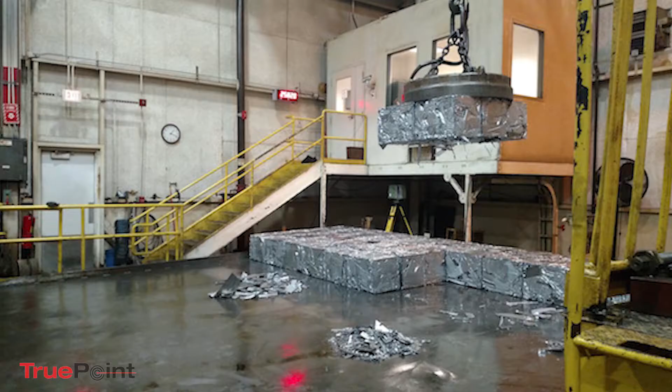The type of facility involved in the project can affect the cost. At TruePoint, we have the ability to scan many different kinds of facilities, from warehouses and refineries to churches or office space. Complexity, line of sight, and sizes all play a major role in determining the number of scans needed for the job. The type of facility and what needs to be captured impacts the scanning technique used to determine the time on site and therefore the cost of scanning.

For example, an empty 100,000 square foot warehouse could take fewer scans than a 5,000 square foot mechanical room, or an office building with furniture in it, or a construction site with a lot of equipment to scan around. The reason for this is line of sight considerations. Our technology requires line of sight, so if there are a lot of obstructions, it will take more scans to complete.

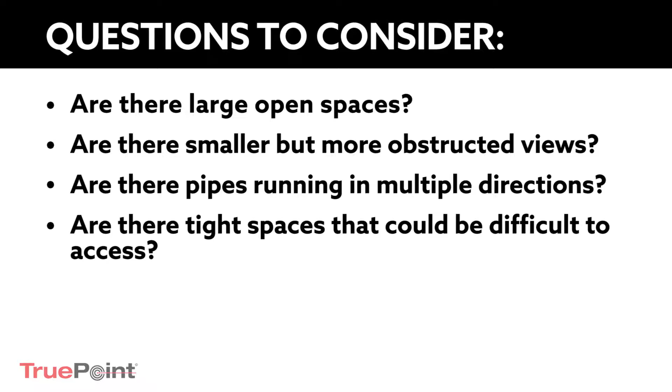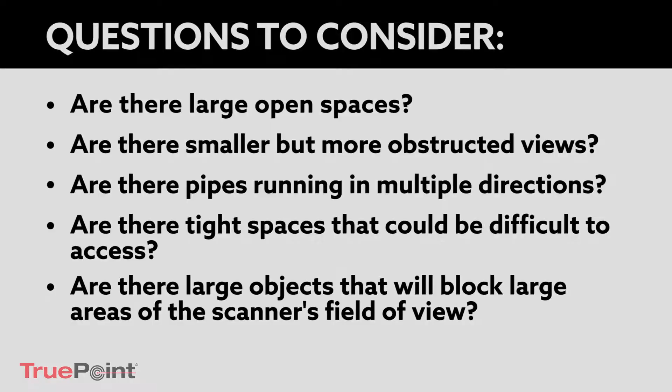So you can ask yourself, are there large open spaces, or smaller but more obstructed views in what I need scanned? Think about how many obstructions, both horizontally and vertically, there are in the space. Are there a lot of pipes running in different directions? That would require more scans. Other questions include: are there tight spaces that will be difficult to access? Are there large objects such as equipment or HVAC systems that might block large areas of the scanner's field of view? All of these considerations impact where we place targets and help us determine how many scans we need.

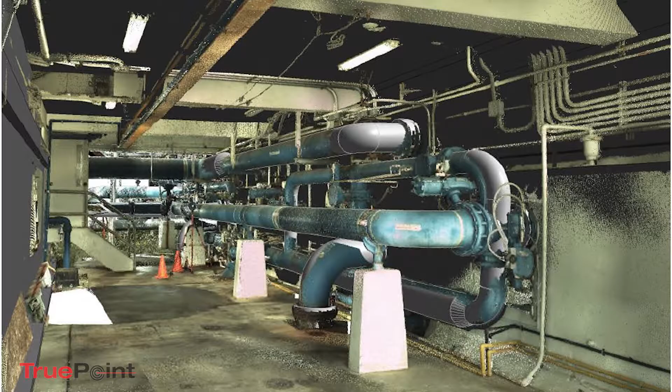Also important when determining cost is the size and complexity of the space. For example, what is the square footage of the space that needs to be scanned? Before we scan, we need to know how many floors, including the basement, rooftops, and mezzanines, we'll be working with. We also need to know whether the space is occupied, or whether there is any equipment, inventory, furniture, or other obstacles in the way.

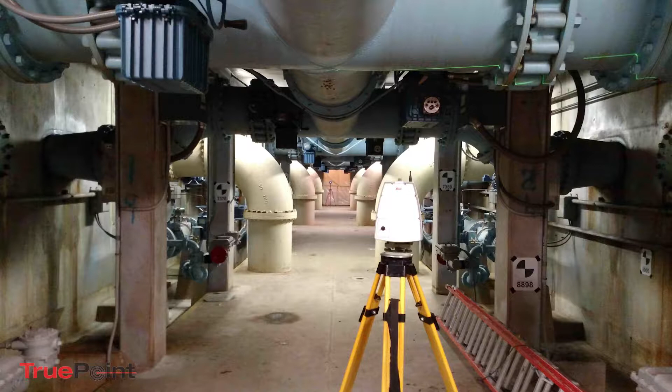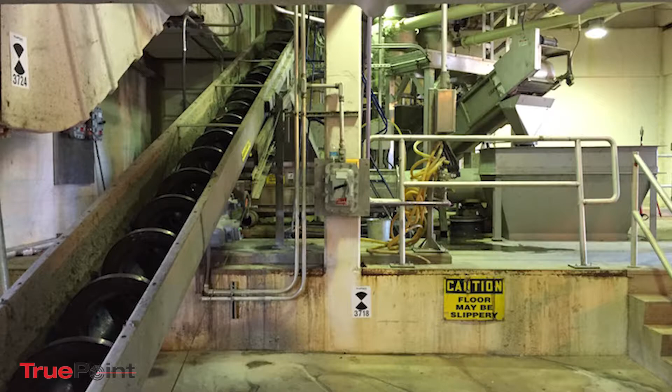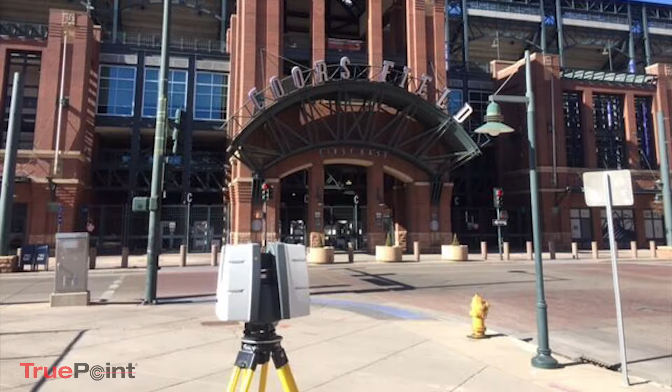Additionally, if it's an active site, are there and will there be lots of people around? Are there trucks that we might have to work around? Furthermore, we need to know how congested the space is. Are there a lot of pipes? Finally, when looking at the type of facility, we need to know if it's interior or exterior, or both - in other words, is the project inside or outside? All these aspects can affect the scanning and therefore are important to know when determining the cost of your project.

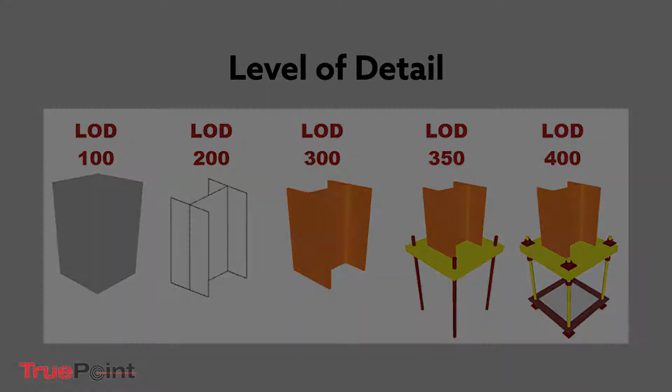Target objects are also factors to consider in determining the cost of the project. Target objects include pipes, conduits, walls, MEP, columns, beams, and steel, to name a few. Related to this is the level of detail that you, as the client, need. The level of detail can determine the number of scans needed, and this can vary significantly. For example, to scan only for structural dimensions - walls, ceilings, floor, etc. - of a room will require fewer scans than if all the electrical conduit needs to be captured. Therefore, it's important to know if you need all piping detailed, or if pipes above a certain diameter would suffice, for instance, 2-inch or greater.

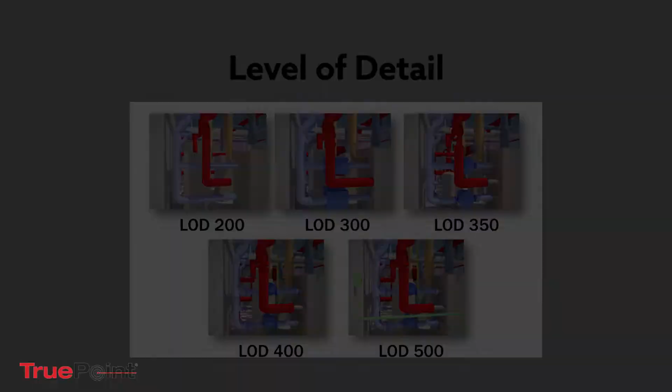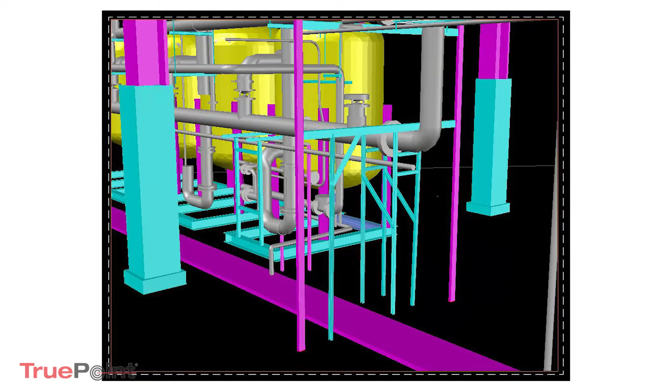In determining the cost of a project, when we talk about goals, we're referring to 3 main things. First, your end goals - what are you trying to accomplish with the data from this scan? What are you trying to get from it? The second is what software you want to use when viewing and manipulating the data. This is related to both your first goal and the last one: what deliverables do you need? Asked another way, what are your goals from the deliverables? For instance, do you just need point cloud data, or do you want something more, such as 2D drawings, a 3D model, or a more comprehensive analysis?

Finally, when determining the cost of a project, scheduling is another crucial factor to consider. This depends on what your needs are as the client. Questions that our technicians will ask include: what will the scanning schedule be? Will we need to scan at night or on weekends? Additionally, are there any safety or security clearance requirements that will also affect how quickly we can start scanning? Along those same lines, we need to know what your timeline is so that we can work to meet your specific needs and deadlines. For example, is the project happening tomorrow or is it going to occur next month? And how much time do we have to complete the scanning and any deliverables?

As you can see, determining the cost of your project is not as simple as one might think. There are a lot of factors to consider. It's not a one-size-fits-all kind of process. We hope this video has given you a better understanding of how the cost of your project is determined.